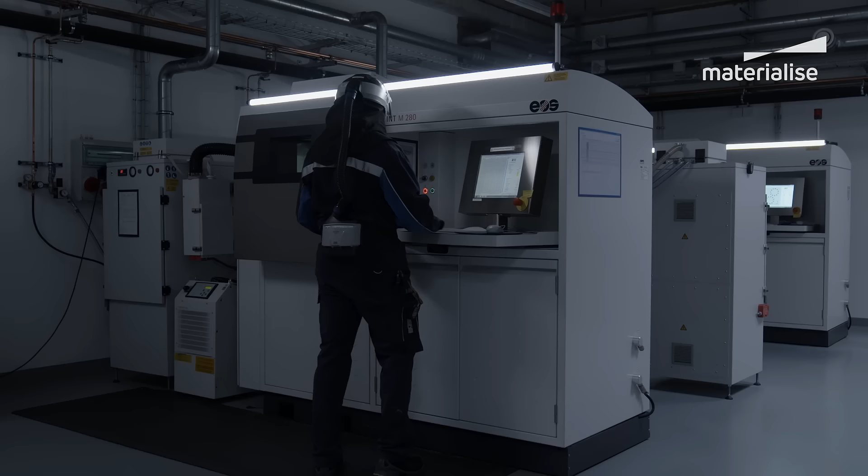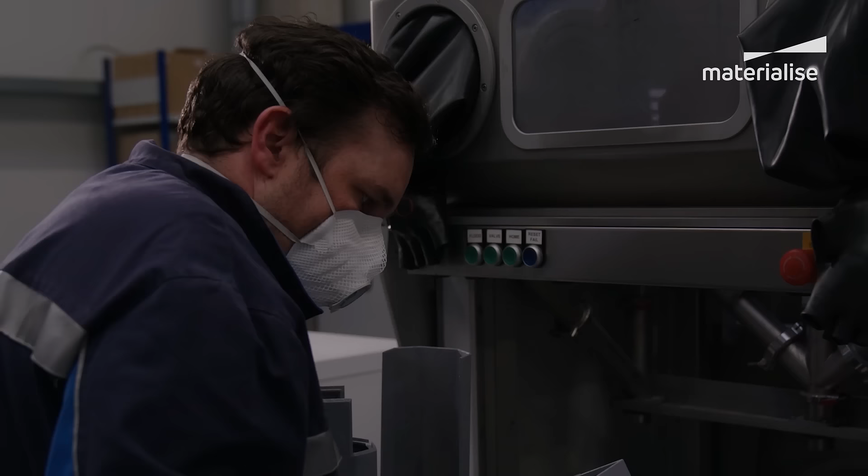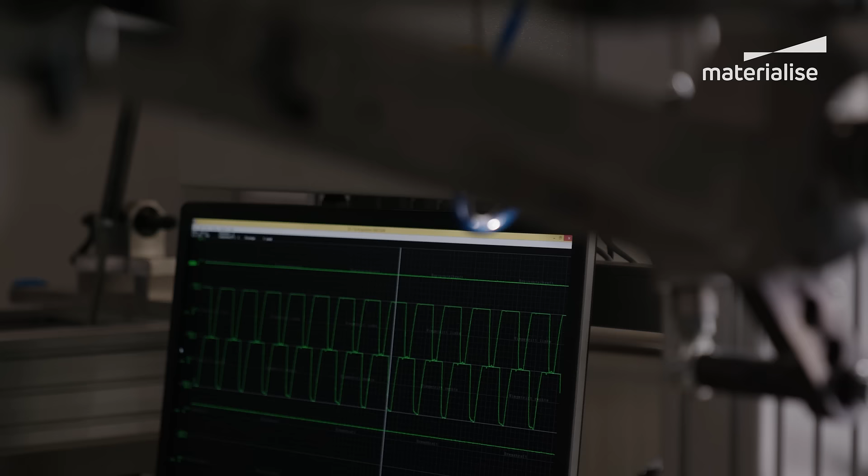Over the past 3 decades, 3D printing has established itself as a versatile and flexible tool in the manufacturing toolbox. As a relatively new technology, it has spent much of that time somewhat isolated from the conventional production process. But in recent years, the wall between conventional manufacturing and 3D printing has started to disappear. We are beginning to see these two separate worlds come together, and the implications of this are huge.

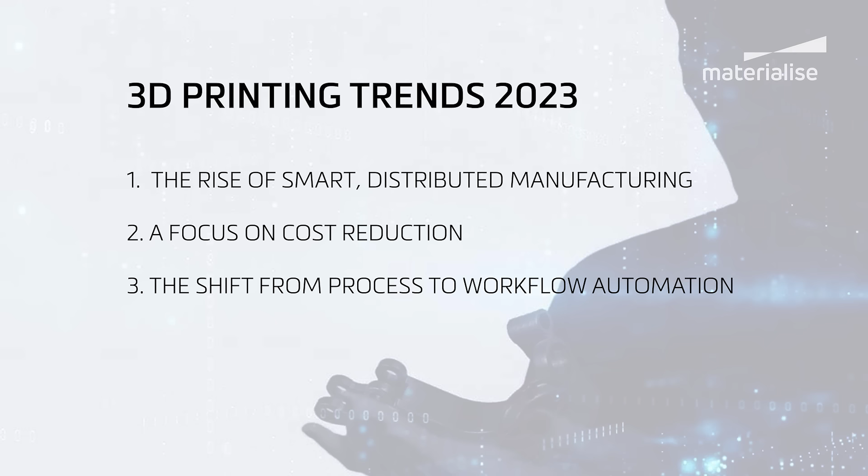Each year, Materialise presents the 3D printing trends that will shape our industry in the coming year. For 2023, these trends hold the key to breaking down the barriers still associated with adopting the technology as part of an industrial manufacturing process. Addressing these topics will help companies scale up their 3D printing operations into volume production and advance the overall adoption of 3D printing.

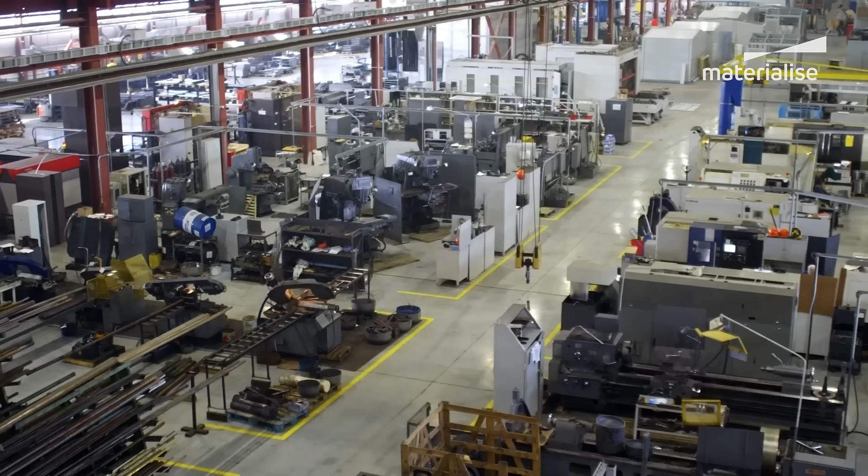Traditionally, manufacturing has always centered on a single location, usually a factory overseas. And that system worked well, until it didn't. In the last few years, we've seen crisis cripple factories and disrupt supply chains. We've seen the rise of geopolitical tensions and increased environmental concerns. All of this together has made manufacturing companies rethink their centralized production model.

With smart, digital technologies like 3D printing, manufacturers can make the shift to operating through multiple smaller scale production sites that sit closer to their customers.

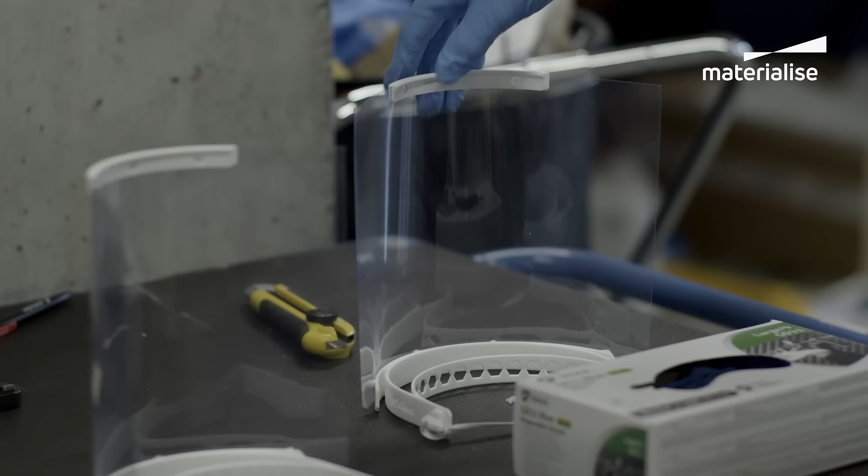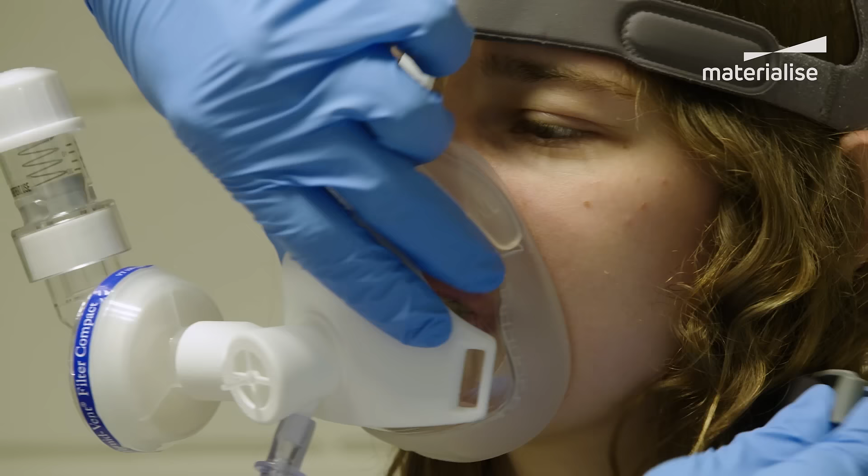However, many of the recent success stories have come from quick thinking in the face of short-term need, like turning to existing local 3D printing lines to produce emergency medical supplies. So you could say 3D printing was used in a more reactive way, as a temporary replacement. But luckily, these solutions did spark new conversations about the future of manufacturing. And we can now see that many companies are ready to adopt a more strategic approach.

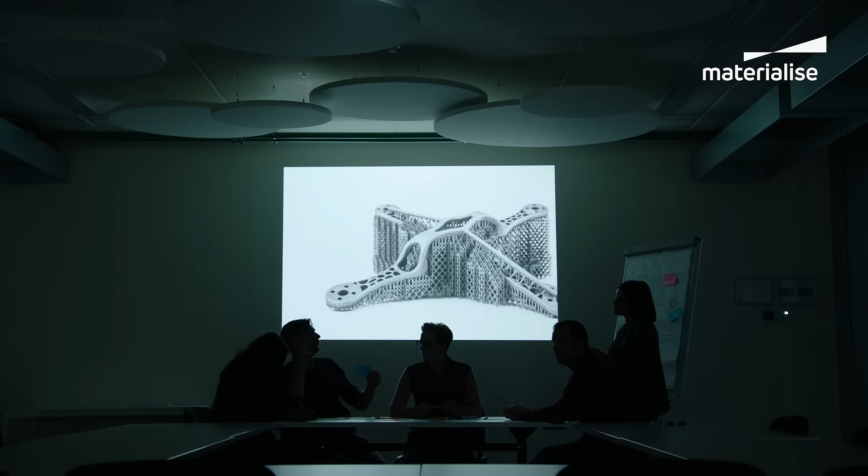These companies will need to carefully consider which applications will provide most value in terms of supply chain efficiency or environmental sustainability. And that requires a change in mindset, a shift from short-term solutions towards using 3D printing as a sustainable production method of certified end-use parts.

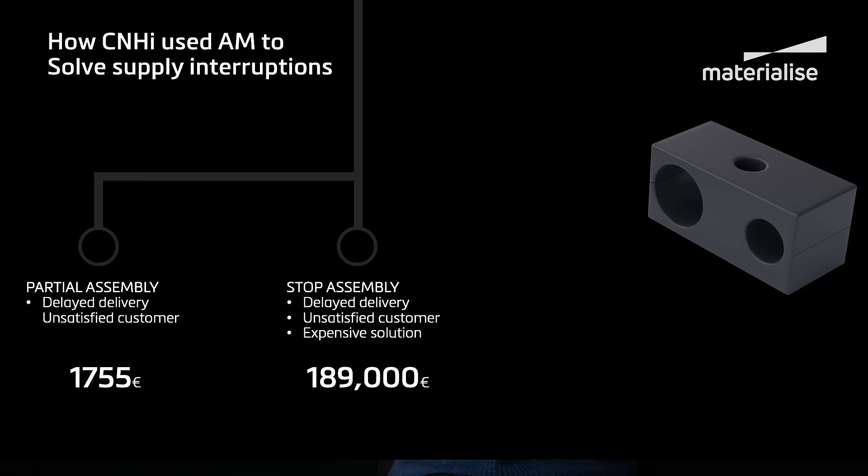You can take the example of CNHi, an agricultural machinery company. During the pandemic, CNHi relied on 3D printing to produce a vital part that they couldn't source due to shipping restrictions. They took those learnings, and now the company is taking a more strategic look at how 3D printing can help manage its supply chains in a more cost-efficient way. So the potential is real.

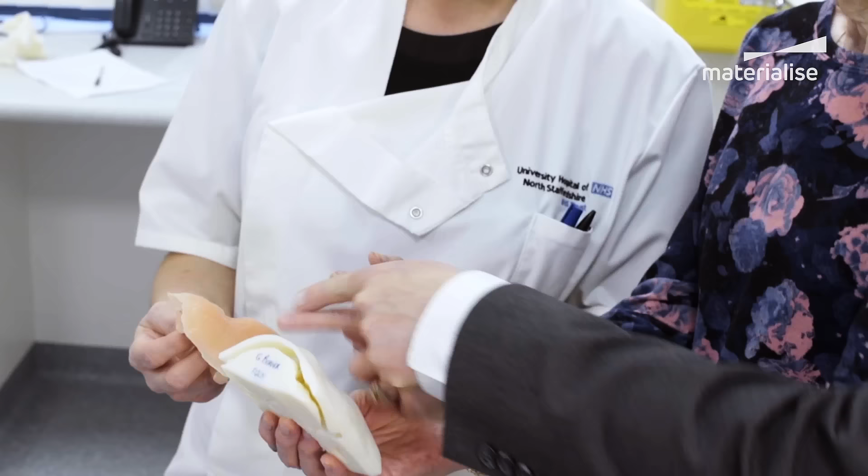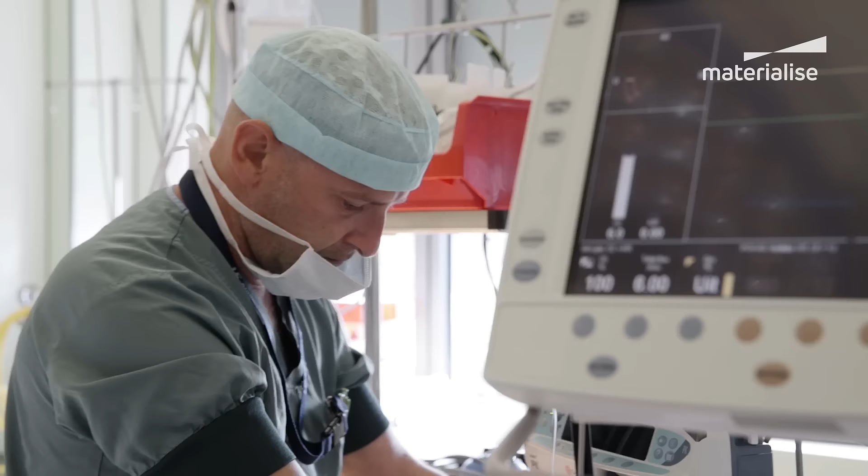Even in the highly regulated and certified medical industry, we see that hospitals are increasingly turning to 3D printing to produce medical models, to produce personalized implants at the point of care, closer to the patient. You could say that's the medical equivalent of a decentralized industrial production model. In the end, smart, distributed manufacturing enabled by 3D printing, when done in a strategic way, can be a successful recipe in its own right, rather than an ad hoc response to problems with global supply chains.

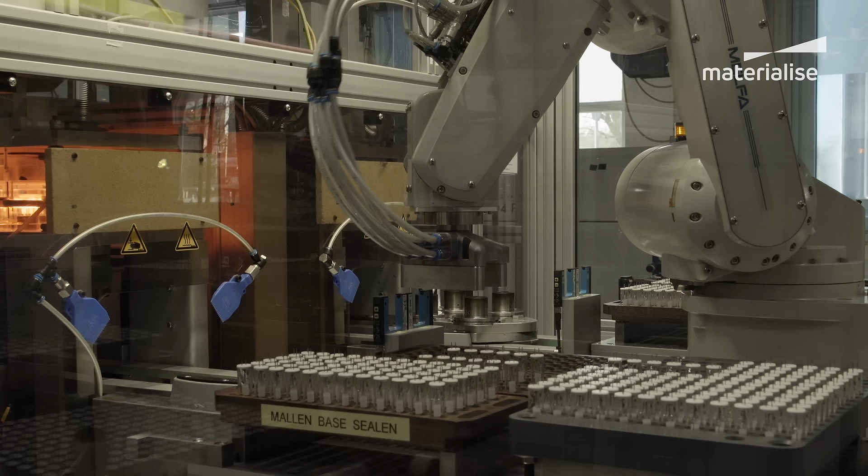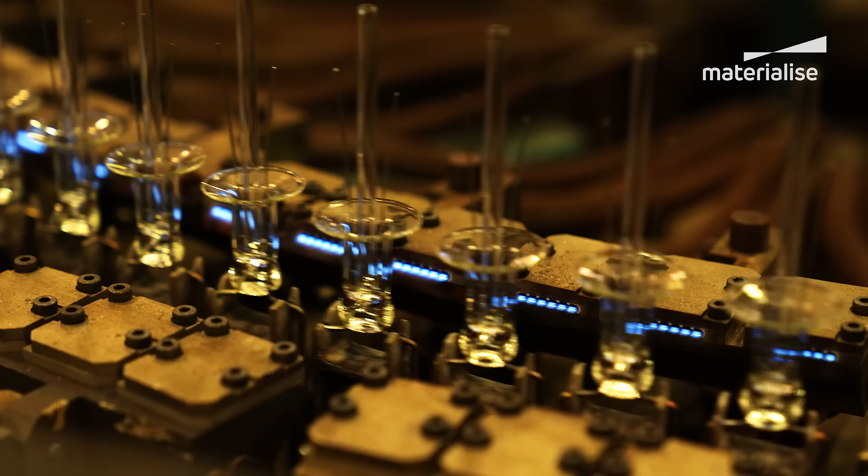The story of 3D printing is a story of added value. 3D printing enables design optimizations that provide performance, weight saving, time, and supply chain benefits that are impossible to achieve with traditional manufacturing methods. In many cases, these benefits create cost advantages that impact the overall end-to-end manufacturing cost, from design to delivery. In fact, a recent survey shows that the ability to reduce the overall manufacturing cost is cited as the most important benefit of 3D printing.

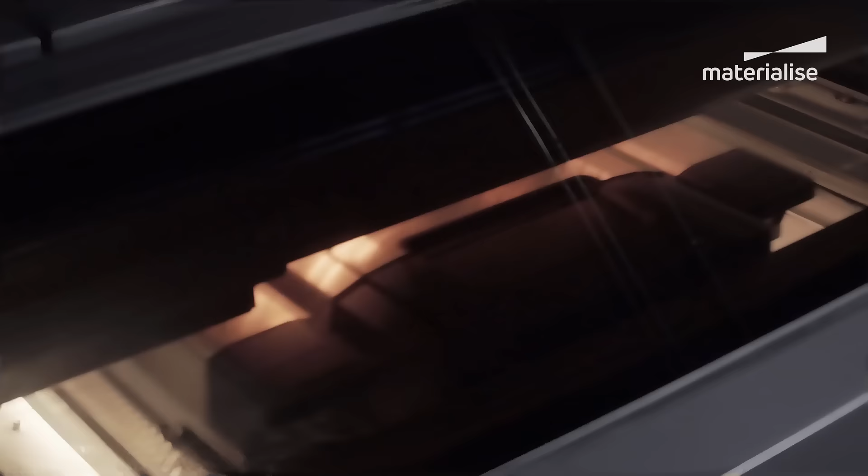But that doesn't necessarily mean that the 3D printing process itself is cost efficient. Increasing material and energy prices have only driven up the costs even more. Several factors determine the cost of 3D printing parts, including the materials required, production time per part, and the type of printer. There are two really important ways to reduce this. The first is by working more efficiently to increase production capacity.

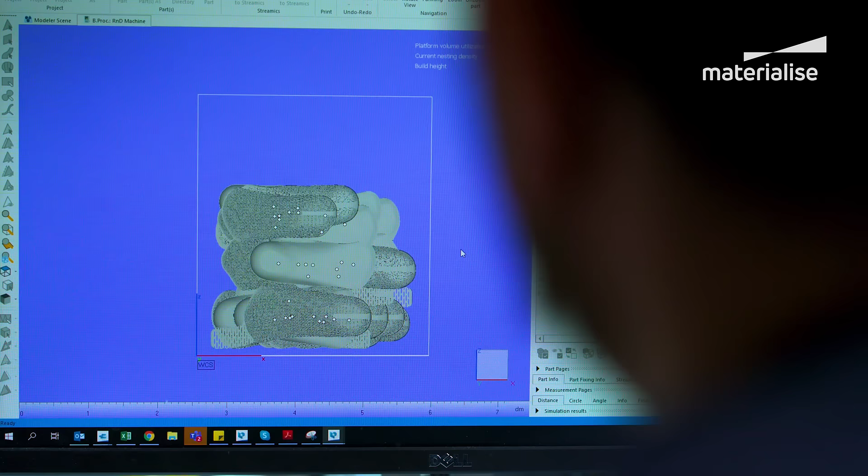Software plays a major role in this by making it possible to optimize the build. We can also tune the printing process to make it more efficient and repeatable.

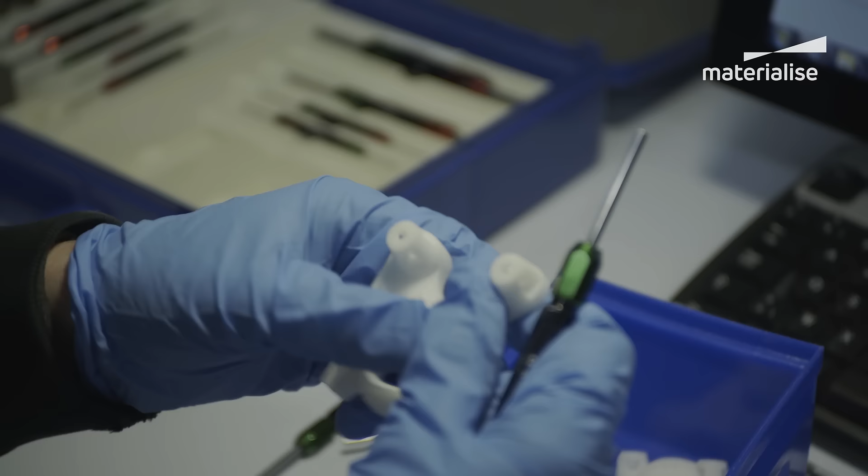The second is using tools that improve quality, and quality comes at a cost. Looking at certified manufacturing in the medical or aeronautics industry, for example, we see that up to 70% of the production cost is in quality control.

3D printing continues to transform the factory floor as companies increasingly turn to the technology for large-scale production. But to accelerate this adoption, our industry will have to make extra efforts to reduce the cost of 3D printing.

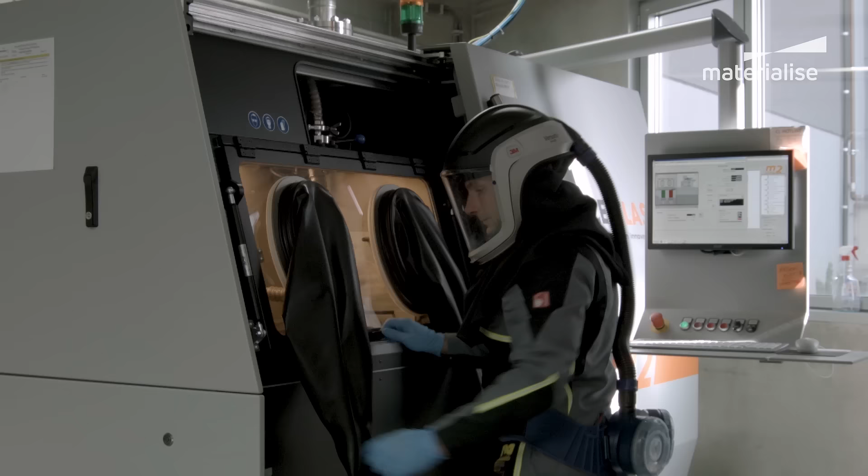3D printing is a digital manufacturing technology, but it still requires a significant amount of human intervention, and these skilled workers are increasingly hard to find. In fact, a recent survey by Materialise indicated that recruiting a workforce with the necessary expertise is the top challenge for companies that are already using or considering 3D printing.

At the same time, scaling up industrial 3D printing production into the thousands or millions requires a repeatable and consistent printing process. These two challenges increase the need for automation.

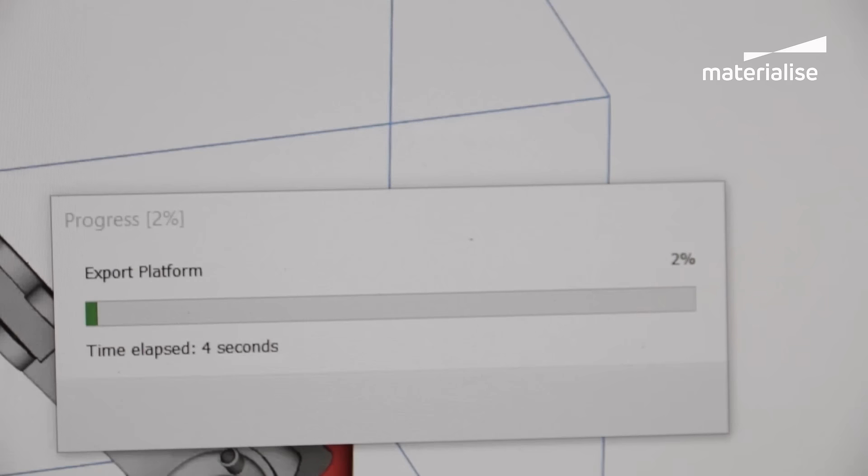In recent years, software has allowed us to automate various stages of the 3D printing process, from preparing and fixing files to generating support structures, optimizing the stacking of objects into a build, or even post-processing. But these are all individual processes.

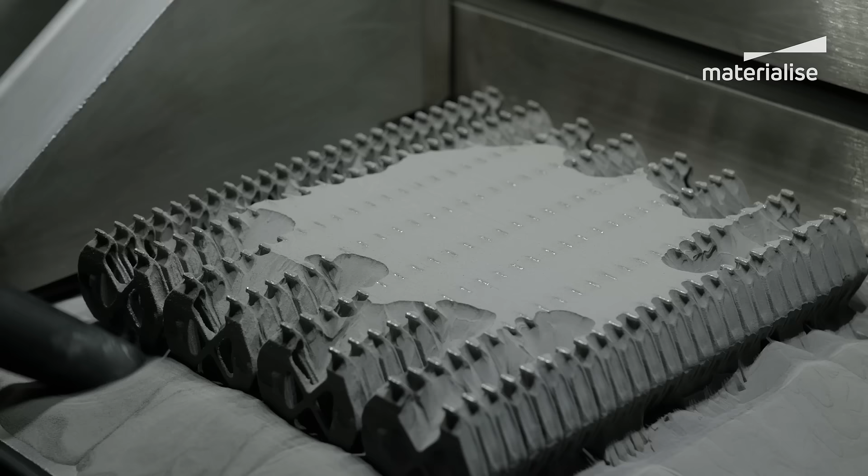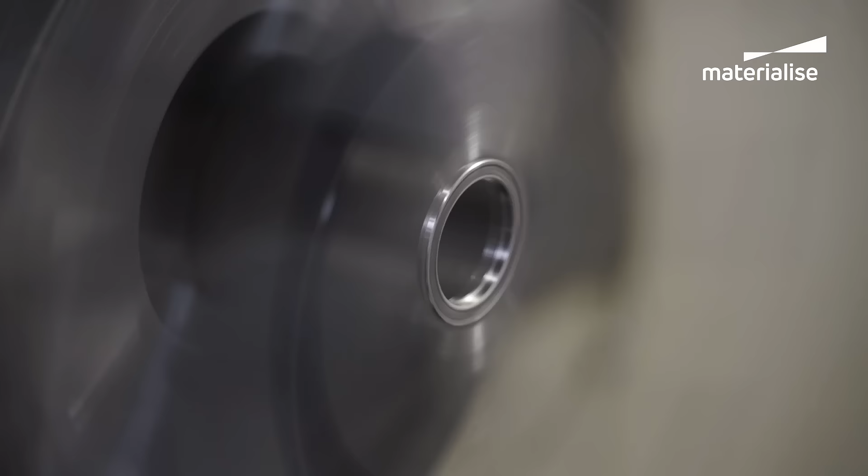In 3D printing, these different processes follow one another, coming together to create a complete digital manufacturing process. The promise of large-scale industrial 3D printing requires us to automate not only each individual process, but also the flow between them, and this is what we call workflow automation.

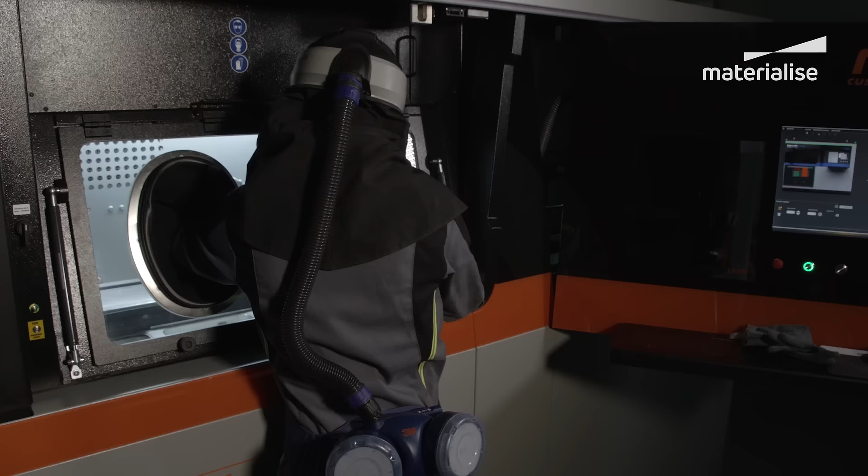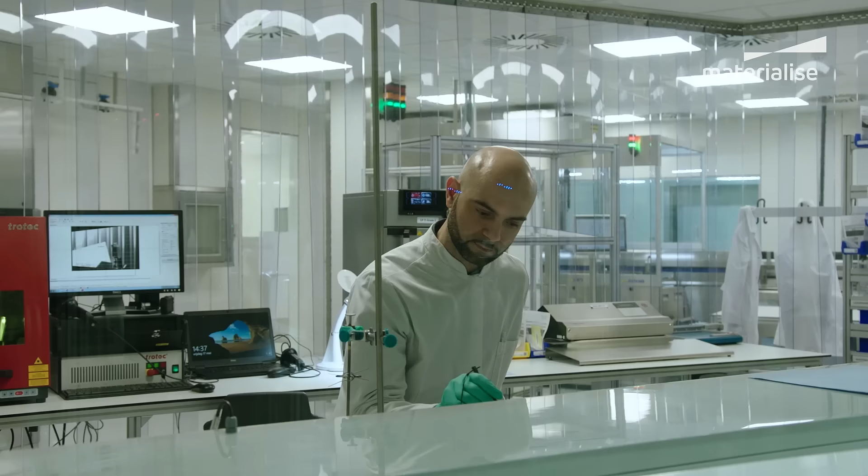We see the same requirement in the medical industry, where workflow automation is needed to address the dramatic increase of customized 3D printed solutions. The good news is that the ability to meet this need is growing, thanks to the creation of software platforms that allow manufacturers to define their own unique 3D printing process.

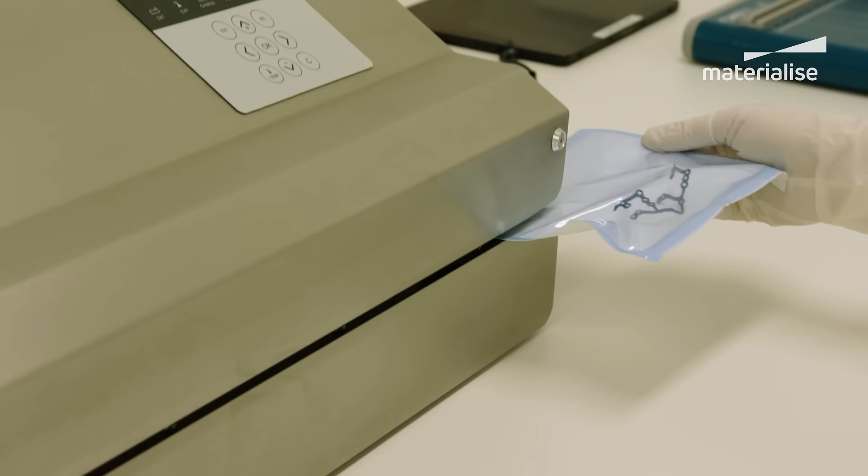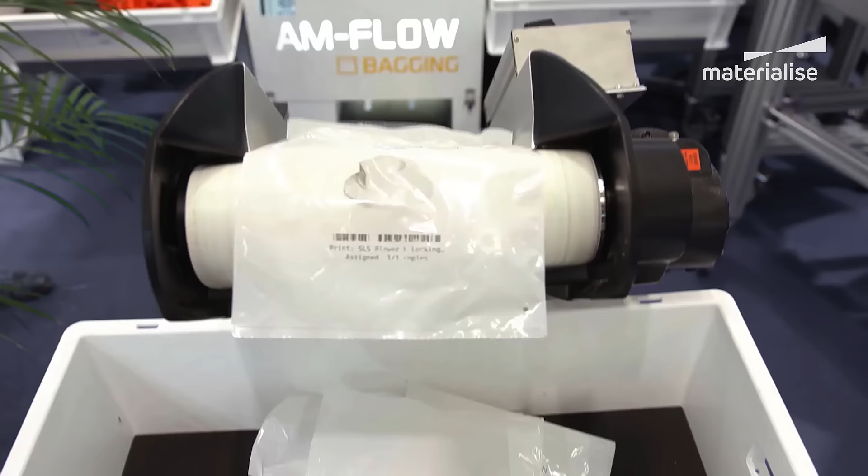Several companies, including Materialise, now offer these solutions to customers, allowing them to automate not just the individual 3D printing processes, but the entire 3D printing workflow, from order intake to delivery and everything in between.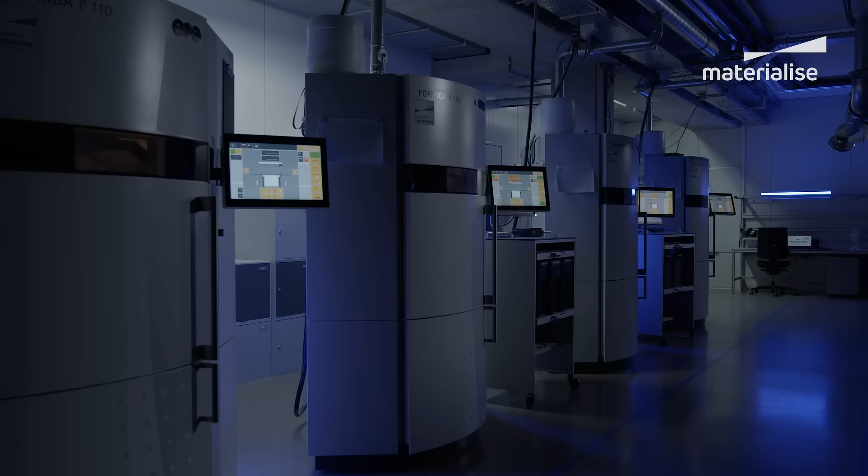We already talked about the important trend of distributed manufacturing. Smart, digital production technologies, like 3D printing, enable a shift towards multiple, smaller-scale manufacturing sites that are closer to the customers. A clear sign that the factory of the future will not be a single central location.

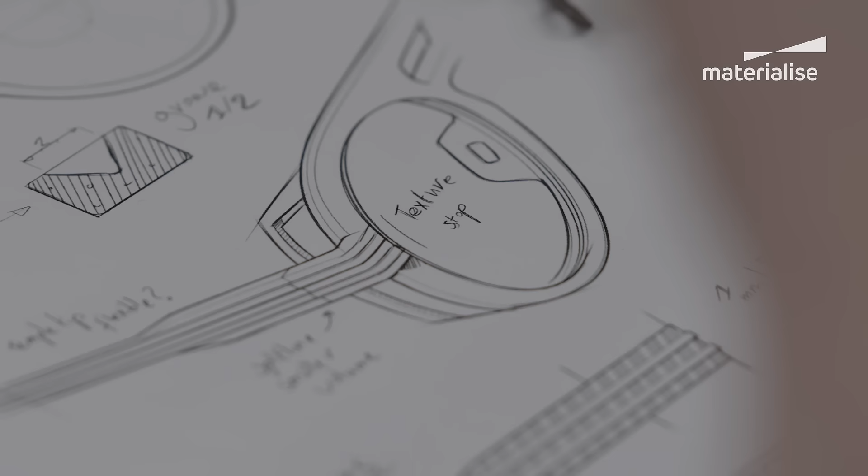This new digital distributed production environment revolves around one key asset: data. And that data needs to be secured, preventing a rogue supplier from stealing a design and printing it on his own 3D printer. Of course, data security is important in any form of manufacturing, whether traditional or smart.

In both cases, companies share their unique designs with contractors and suppliers, and they want to know that their design data remain secure. But with 3D printing, there's more to it than that.

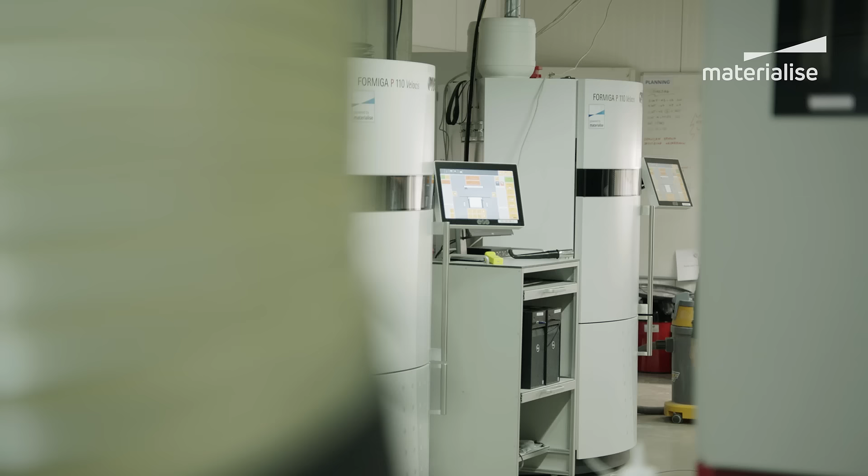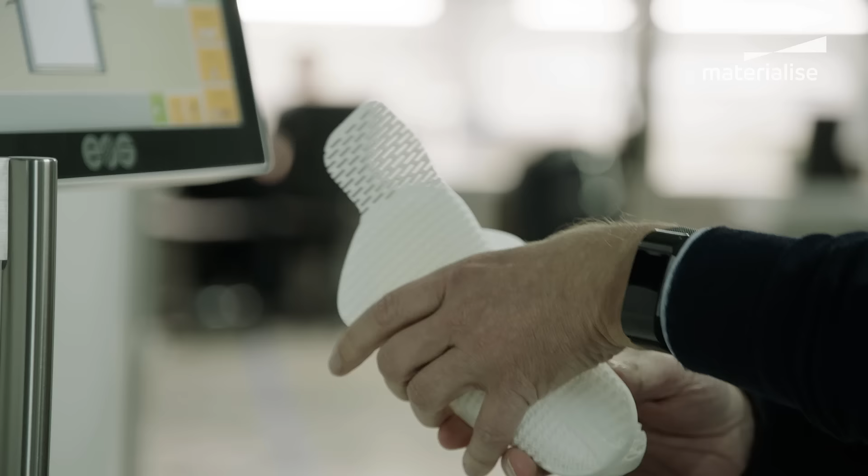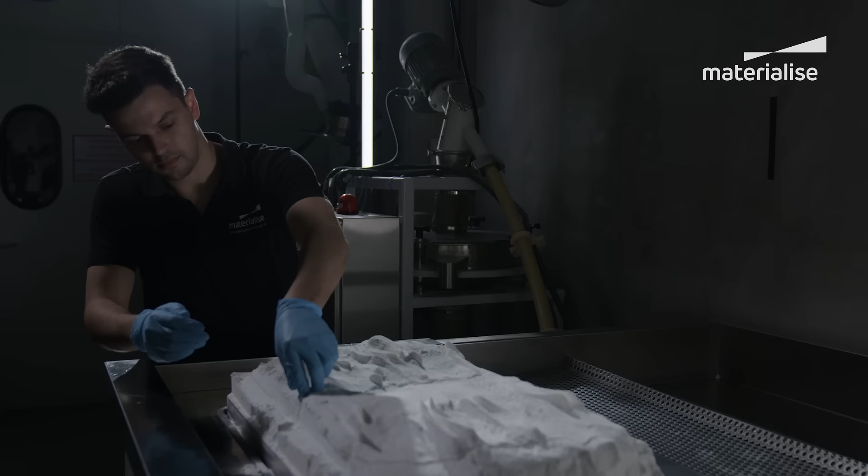Manufacturers that plan to scale up the production of a 3D printed part into the thousands or even millions need to optimize and fine-tune their unique printing process to make it efficient, reliable, and repeatable across multiple production sites. A smart production process ensures that all 3D printed components have the same quality no matter where they are produced.

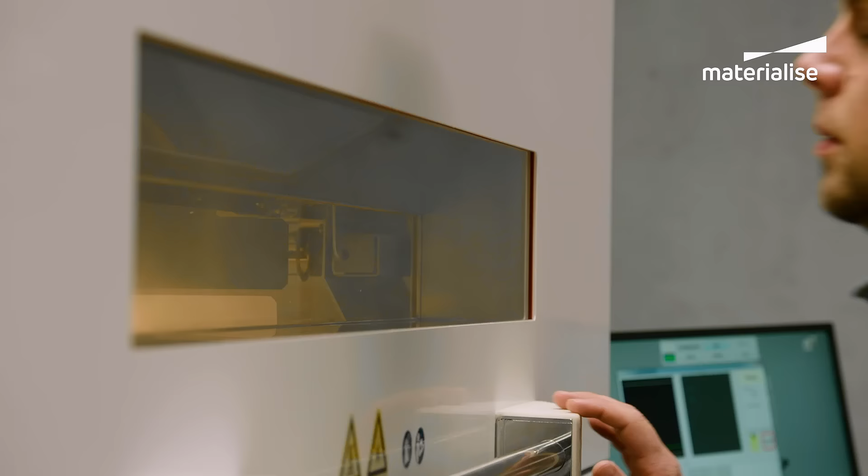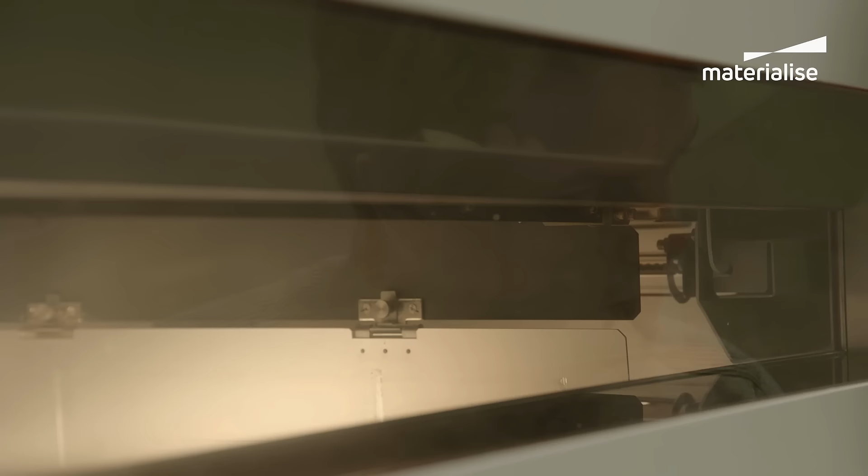Creating such a process is complex and time-consuming, but it allows companies to leap ahead of the competition. That's why, in addition to data security, data integrity, meaning the close and secure link between the design on the one hand and the production parameters on the other hand, is becoming top of mind for companies that embrace digital manufacturing.